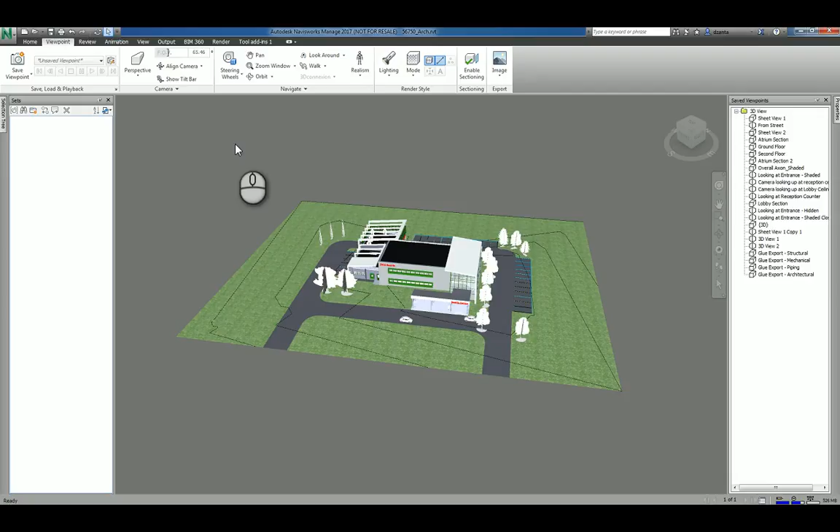What are sets? Sets is a way for you to select objects in a group and save those selections for easy use later. For example, if I go in here and I select a tree, and I go over to the Home tab, you'll see under the Select feature, you can choose Select the Same or Select All.

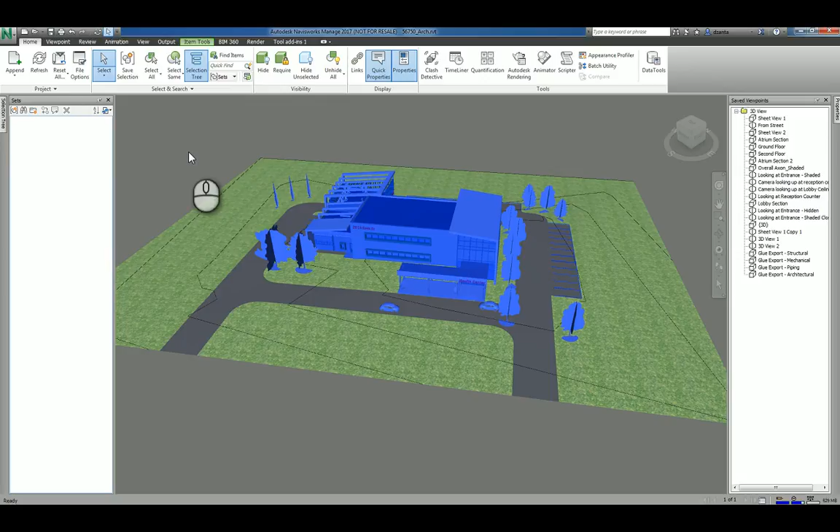If I choose Select Same and I say Same Name, it's only going to give me that one because each one has a unique name. However, if I say Same Type, it's going to grab everything that it can find of the same type. Because this Revit model was drawn the way it was, you might have issues.

So another method of approach is to select it and try selecting the same geometry. And if that doesn't work, then the last resort is to manually select the ones you want. Hold the Control key down for selecting multiple entities. So let's just say hypothetically this is what I have. Oh, here's some more trees. And I want to save these selected trees as a set.

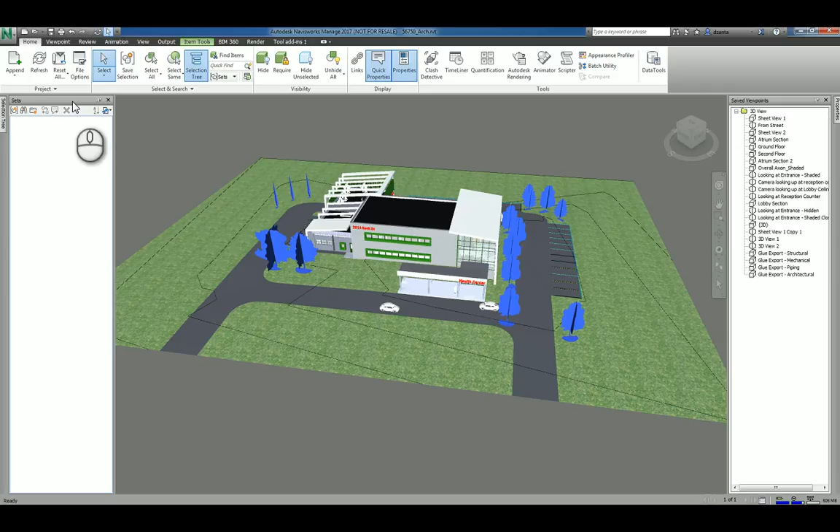So over here in the panel called Sets, you can go ahead and right-click and say Save Selection. Call it what you want, hit Enter, and now it's saved. If you click out into space, nothing is selected. If you click Trees, it's now selected. And so it just makes it easier for you to grab things.

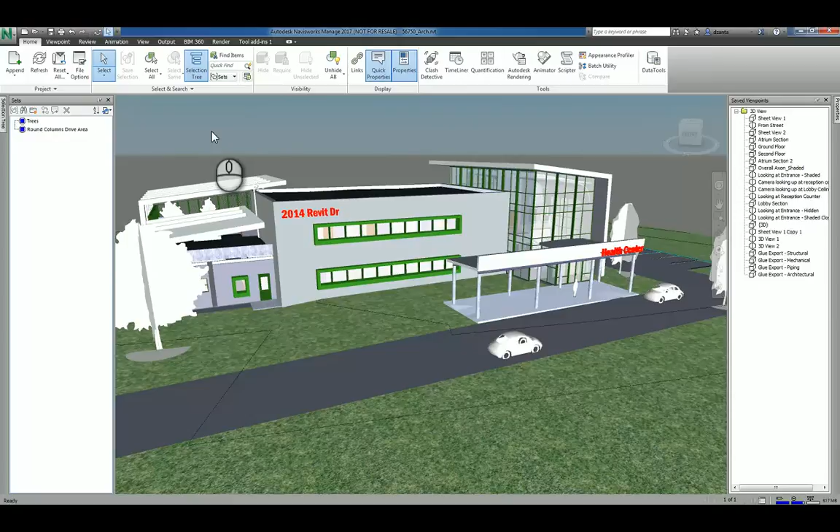Let's do this again. Let's go through the process of picking this column and saying Select the same type. And now I have all those columns selected. I can right-click and save that selection as, say, round columns drive area, something like that. And again, click into space so nothing is selected. Click it again, and it gets selected.

And the reason we set up creating sets is so that you can actually manipulate them as a whole, or you can even do things like clash detection, which we'll take a look at in another video. So when you go through that process of creating sets, that's one way to create sets. You can use the Save Search tool here to hit the save. That's the same thing as hitting Enter.

You can create a new folder, call it whatever you want, say External Views Sets. And if you do this, then you can click and drag into that folder the views that you want, and that way you can kind of organize what you're working with. If you need to, you can right-click a particular view and update it, delete it, rename it, copy it, hide it, show it, so on and so forth.

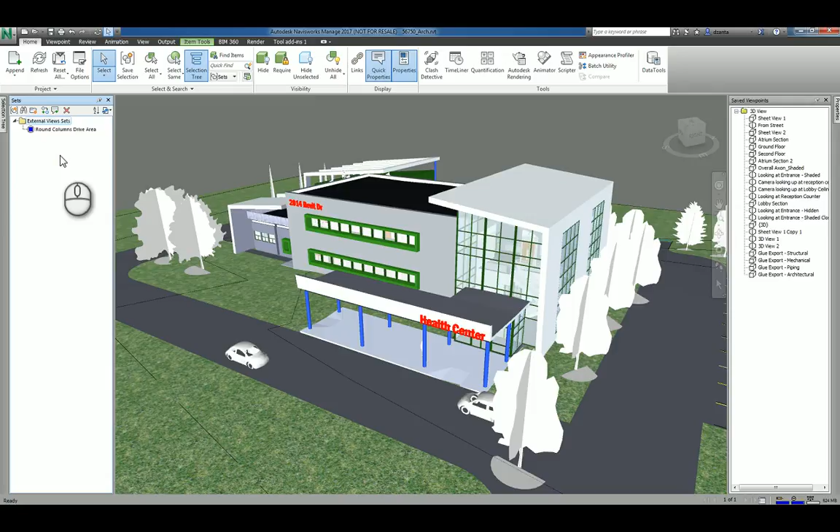And then you can duplicate a view as well, and you can add any comments that you want. And then you can delete any sets that you need. So let's say I select and drag this and it won't let me drag, then I'll just go ahead and right-click and delete it. I'll go here under External Views, and again, zoom out a little bit, and I'll pick the trees again.

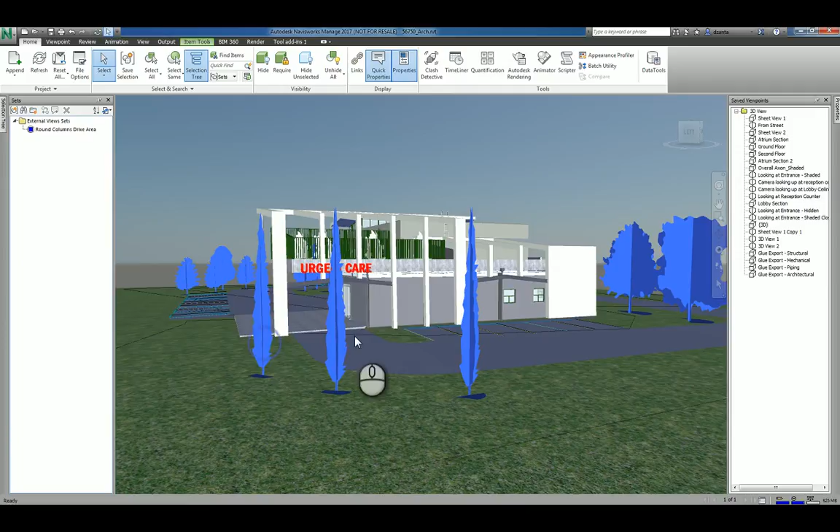And then I'll save this, right-click and say Save Set, and call it Trees. Now, you can try and drag and drop that into that folder, and it will move it into that folder. You can obviously sort this as well alphabetically, and you can import or export any sets that you've created in another Navisworks file or this exact Navisworks file.

So for example, I can say Export Search Sets, and I can take all of these sets, and they export as a single XML file, and you put it wherever you want, and you're done. If you need to import it, you can click Import Search Sets and go to that file, select it, hit Open, and they'll get loaded back in.

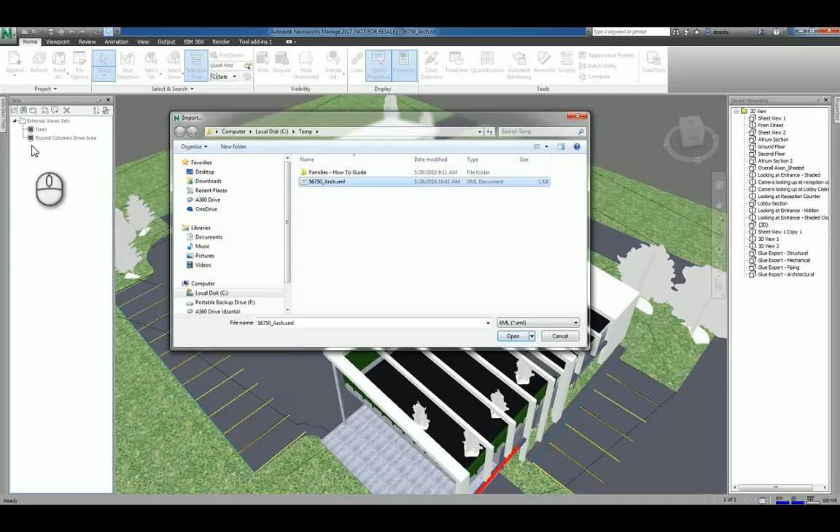So this is how we create sets in Autodesk Navisworks Manage 2017.